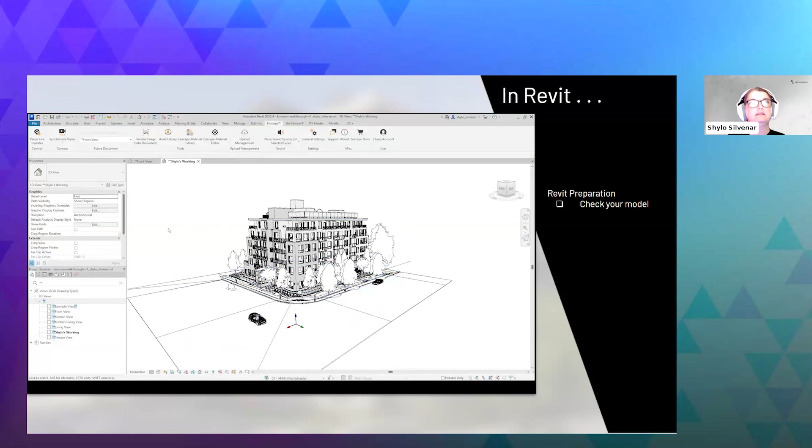So here, we're first just going to check out the Revit model, take a look at it. We're going to create a 3D scene specifically for our rendering before exporting and make sure that there isn't anything extra in that view, like this extra topography. Again, you can edit it in Envision later if you want to, but it's just nice to get this step out of the way early.

A quick tip is to pay attention to your links and additional models in your Revit file. If the positioning isn't too precise, we can import those separately and combine them later in Envision, giving you more granular control and potentially better results. Enscape is pretty good at handling large models as well as multiple links, so either way is fine. If something causes slowdowns, like an enormous file or a slow computer, just take a minute to hide what you don't see in your rendering view, and that should help.

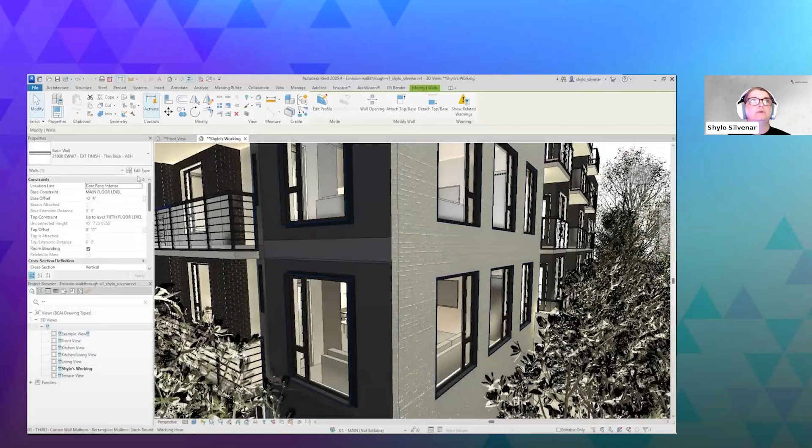Here we're going to take a look at our materials. You just want to make sure that your textures are showing up properly. Envision has the Cosmos library, which is full of materials you can use for general stuff, so you really just want to focus on your custom manufacturer materials and things that are really specific to your project.

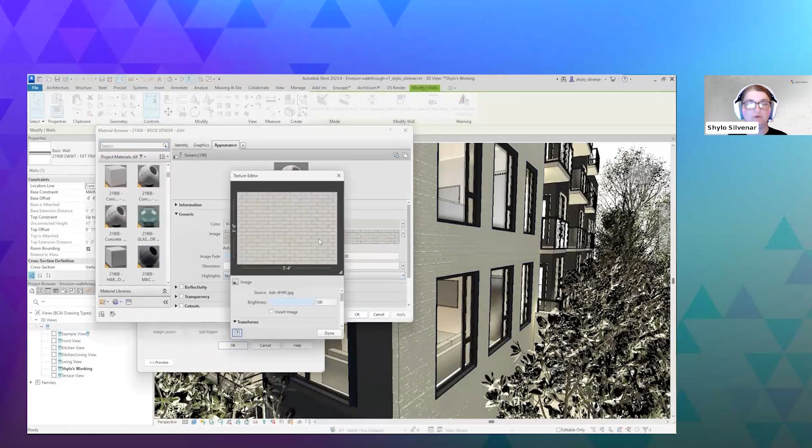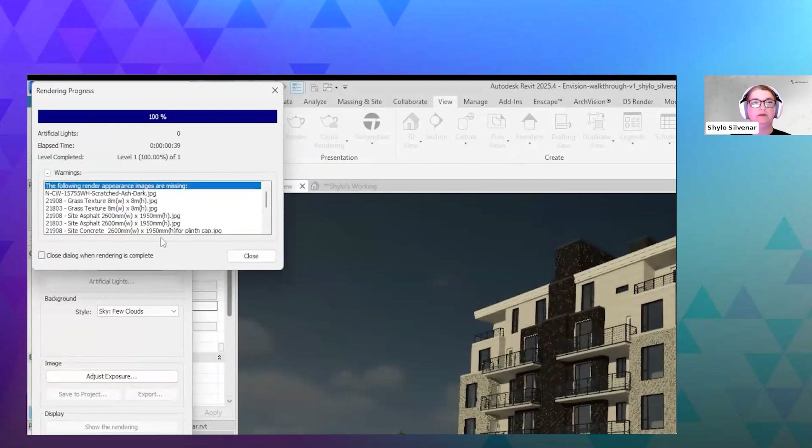This is a nice tip that I found helpful. If you run a rendering in Revit and uncheck that close dialog box, it'll give you a list of missing textures, and I thought this was helpful. None of those are particularly needed for this project, so I wasn't real worried about them, but it's a nice thing to have in your back pocket when you need to find out what you're missing.

Once the model looks good, you launch it in Enscape. Take a look for anything that might be a little bit buggy, whatever. You don't have any flying trees or anything like that.

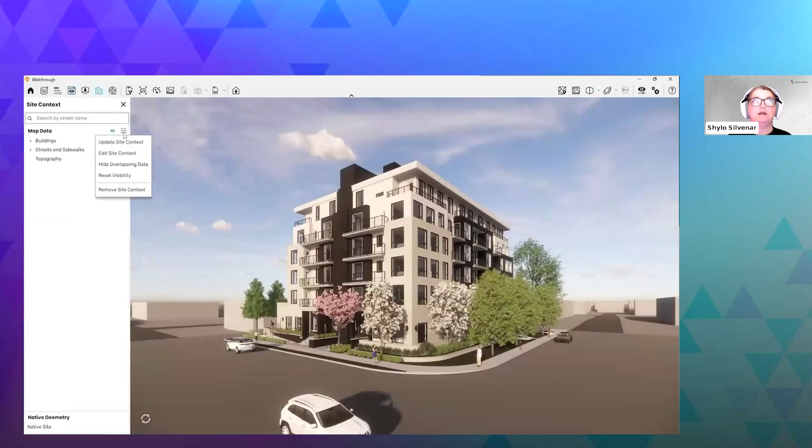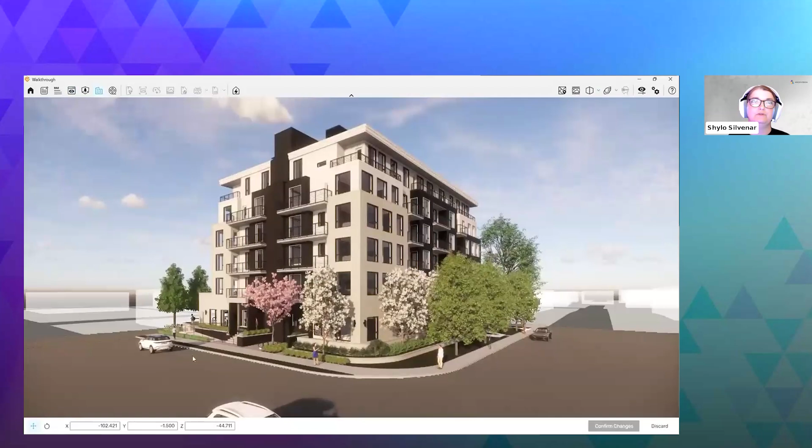You may want to add some context. This one did not come with a site context, so I am using the site context option in Enscape, which is really nice. I found the location on the map in there and downloaded it. It's a little bit off, so you might have to adjust it a little, and the topography might not match up exactly. So what I did here was lower it down a little to set it in the background, just to give it a little context.

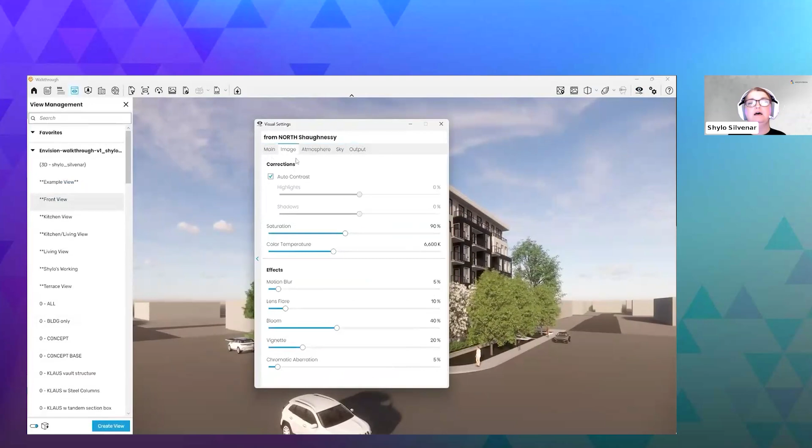What we're doing here is checking the visual settings. It's worth taking a look at what settings you have in Enscape if you use it often enough and have settings that you like. You might want to take note of those so you can then look at your settings in Envision. They're not going to be apples to apples, they are different types of settings, but there are a few things you might be able to match up, or it might give you a hint as to how you've liked your images to look in the past. Things like outlines and the styles in Enscape aren't going to translate, so just keep that in mind moving forward.

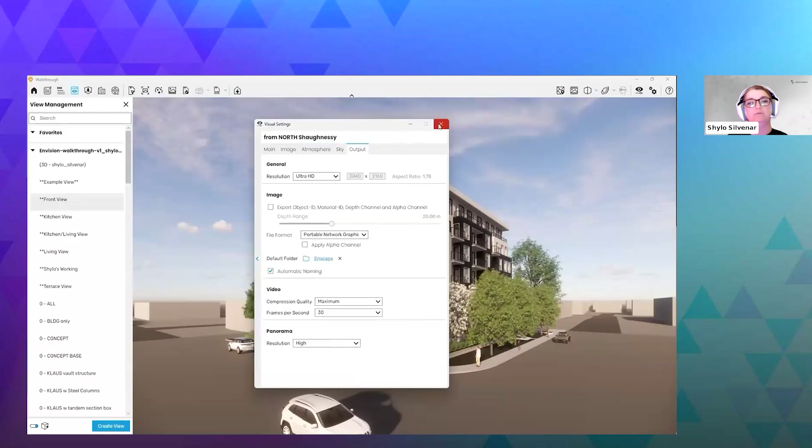To export in Enscape, you're going to go up to the V-Ray Scene export icon at the top, select your view, and export. Super easy. It might tell you a little bit about its limitations, just click on through that. And it's already pre-named, so you're just going to find your project folder and save it there.

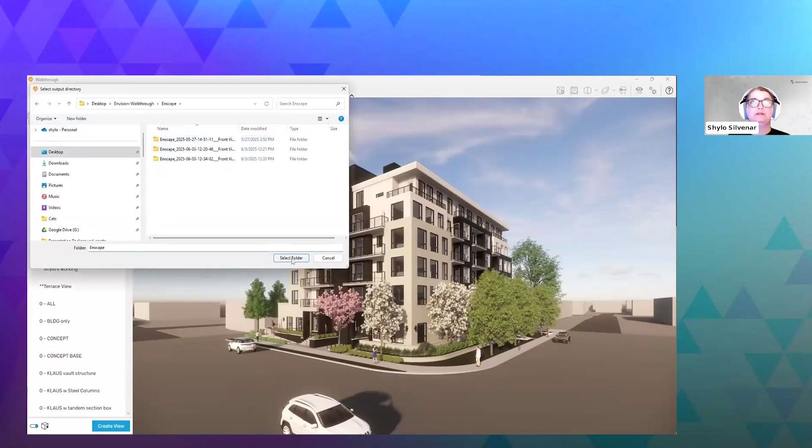So now we're going to set up our scene in Envision and get started. When you open up Envision, you'll see the homepage and options that you expect. For a deeper dive, I suggest visiting the Get Started tab and that link there to go to their online course. We're going to start a new scene.

When you open it up, it's going to highlight all of the UI elements for you. I'm not going to go through this, you're welcome to go through it at another time. You can toggle this on or off anytime, so if you want to bring it back up, I'll show you how to do that. You can go into your preferences, and here you can set up your theme as well as hide or reveal onboarding screens.

Importing our file is pretty straightforward. Import, find your file, open, and it's super fast. So you probably could have figured that one out on your own.

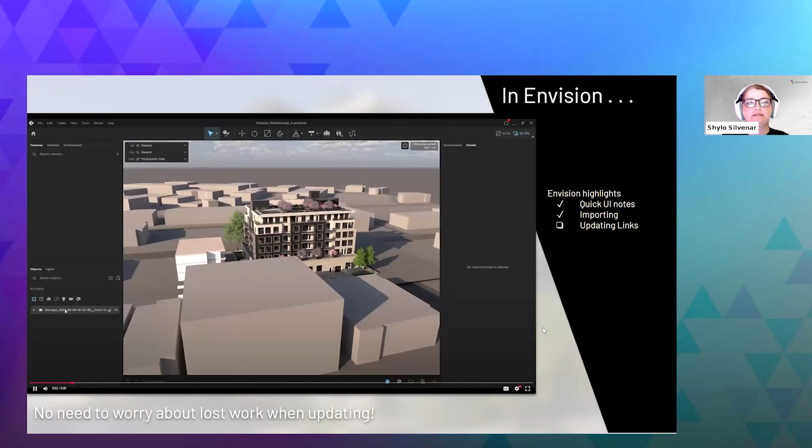If we need to update or replace our link, you want to select the model at the highest hierarchy in the objects panel, and you have a couple of options on the right. You can replace it by selecting the little folder icon, and all you have to do is click that and find the one you want to swap in its place, or you can hit the plus sign to add a new version. That allows you to swap back and forth between files so you can compare something. It's worth noting that things you've worked on, like if you've moved stuff around or done any work in your project in Envision, when you update that, it's not going to change anything as long as it still exists in the project you're importing.

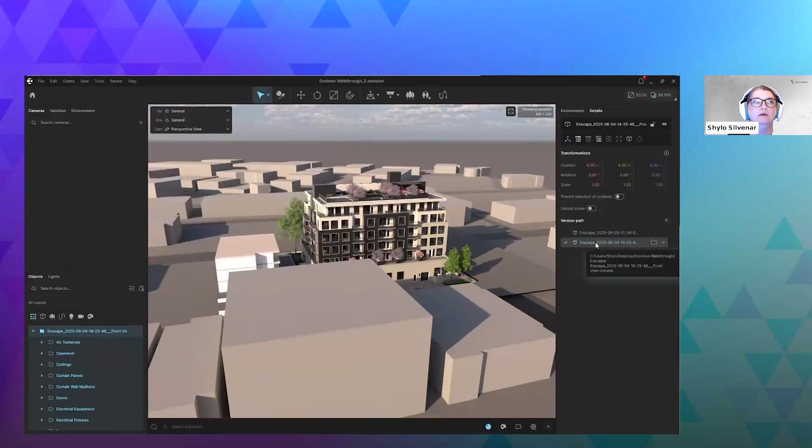Envision may not import our cameras, and it did not for us, so we're going to have to create one. You can do that on the left-hand side by clicking the plus icon, and you can rename it by double-clicking here.

It's worth noting that it has its own category in the objects list below. And don't forget to lock your cameras when you get them to the right spot, because it's real easy to not realize you're in your main view.

Clicking on the camera opens the contextual view under details, and here you've got all sorts of settings. Under general, we've got our aspect ratios, we've got our focal length. We're setting it to something pretty typical like 35 millimeter, and we've got automatic vertical tilt. I'm checking this because we use 2-point perspective in Enscape.

Under the color correction options, I'm increasing bloom a little bit and locking the camera.

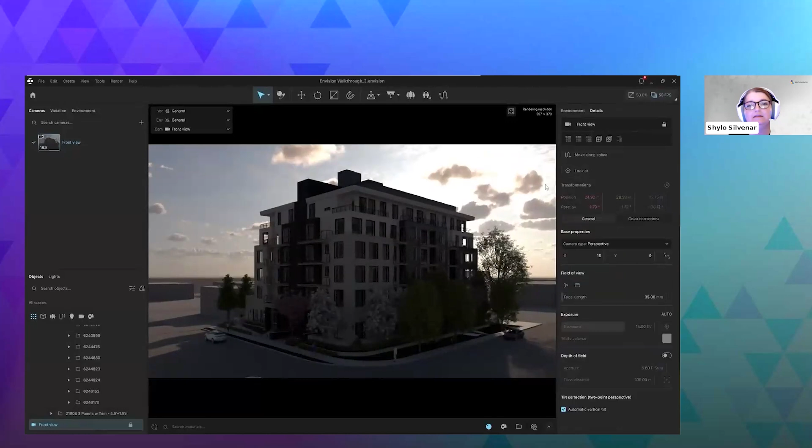You can come back later and further adjust the camera when you're ready. I wanted to highlight the color correction settings because I think they'd easily be overlooked, and that's where a lot of the settings available to you in Envision are located.

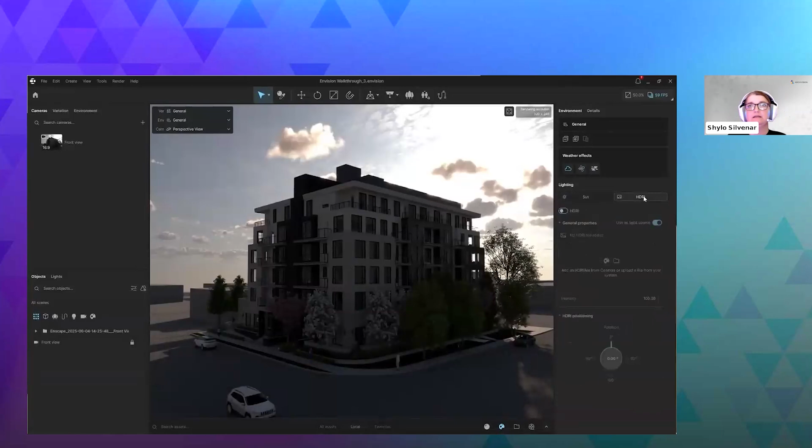Now that we've got our camera set up, we can look at our environment settings. So to do that, we're going to go over to the right, and here we have some weather effects that you can turn on or off or adjust. We have the clouds on, wind, haze. We have physically based lighting and HDRI lighting that can be used independently or together. Cosmos has a lot of HDRIs available, or you can load your own.

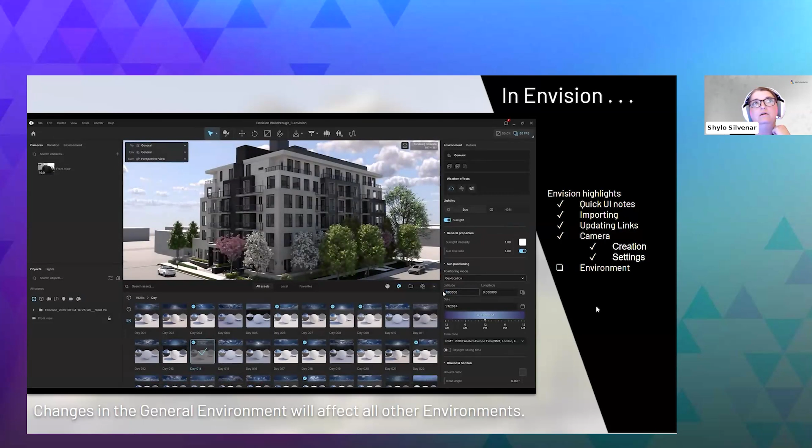We're going to use the sunlight settings and the location of our building. Unfortunately, the view that I have here is a little bit shady most of the time, but we're rolling with it. Don't forget your time zone and adjust the time so that you can get your shadows right.

When we're happy with our settings, we can move over to the left side and create an environment to save those settings. Here you can see the new one that we just created and 3 others that I created previously for our animation later.

Envision has a really cool feature called variations. If you open the tab in the left panel, we can create a new variation by hitting that plus sign. You can see here that I already have 2 that I've created. The first one is pretty similar to the general variation that we have selected, and variation 2, I've put the building below the ground so that we can have it growing up out of the ground.

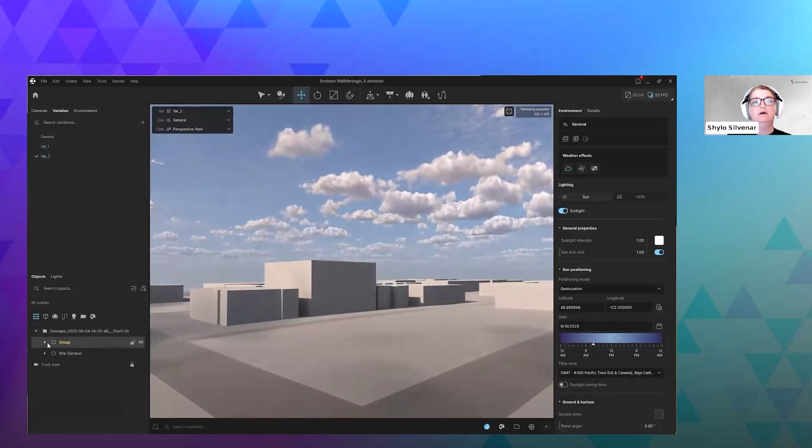There are some things that you cannot do in a variation except for the general variation. You'll notice here that the group nodes can't be grouped in one of the new variations. You have to go to the general variation to group nodes. This is because anything you do in the general variation tab will affect the other variations, and things like grouping have to be done globally in order for it to work properly.

So general variation affects everything. Things that would affect everything would need to be done in the general variation tab.

Okay, so now we're getting to the fun part. Envision actually allows you to edit the model, not just render and fly through it with a camera. So that's a lot more fun.

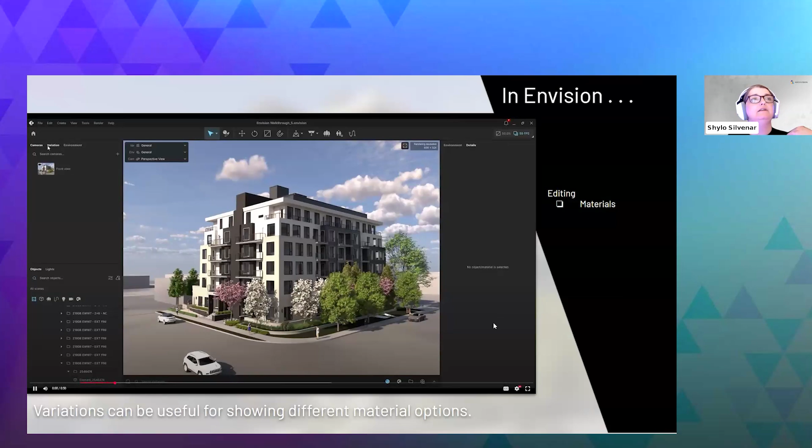Let's take a look at editing our scene in Envision. We're looking to make sure we're in the correct variation and the environment and the camera. So we're making a working camera here so that we don't mess up our front view. And our environment is general, the variation is general.

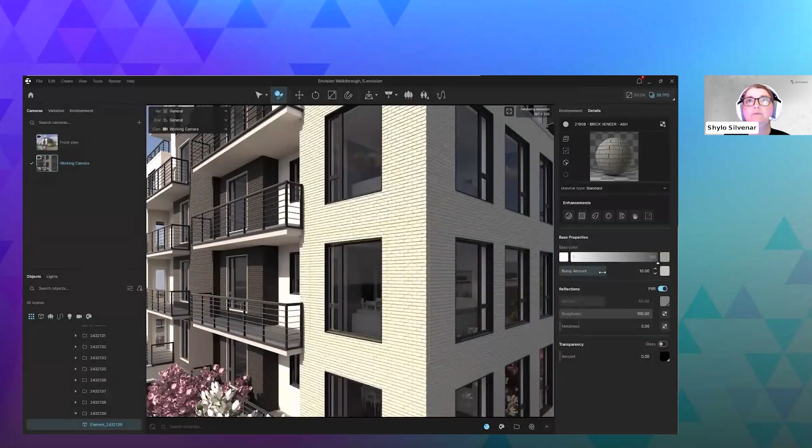We'll edit our brick material. So we're going to zoom in, which is why we added that working camera, and we'll use the eyedropper tool to select our material. Now there's all kinds of enhancements we can do, color changes we can make. I've noticed that the bump on this is going out instead of in, so we're just fixing that a little bit on both of these materials.

So it's super accessible, super easy.

Now we're going to edit some of the geometry. I've selected some of the site behind the building there, and I'm trying to scale it up, and you'll notice that it pops up off the site. That's because the pivot point is off somewhere that we have no idea.

So we're going to fix that by undoing the scaling that we just did, and we'll go up to the Edit Pivot Point button. We're going to move that pivot point to the bottom center of that object, and click Apply. Now when we scale, it will work just like it's supposed to.

So I like that the pivot point's really easy to adjust. It's handy for things like animating doors and stuff like that too.

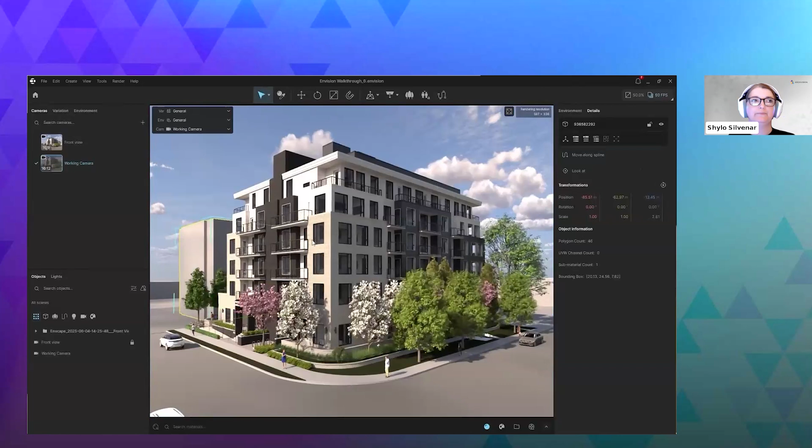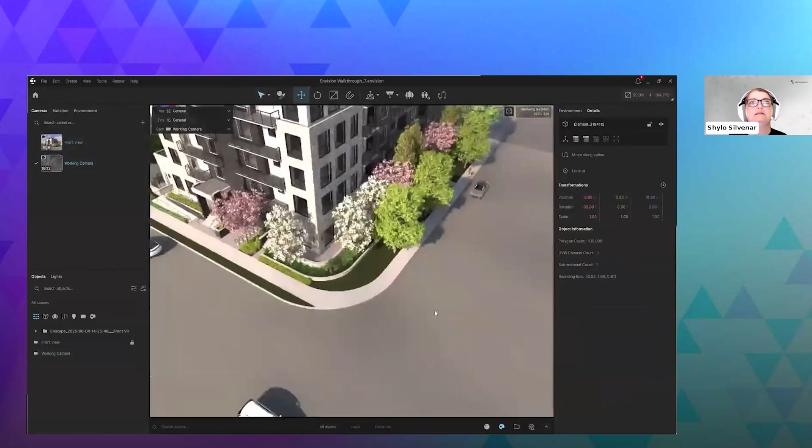We can totally edit assets we brought in, similarly to the geometry we edited a moment ago, with the idea that we're going to be animating the scene. We want to move these guys around to suit an animation since they're not animated, so we'll put them in places where it makes sense for them to hold still. This is really nice because it allows you to use assets already in your scene in a productive way. You don't have to reselect new characters or assets to do that. It just increases your variety and makes selection a little bit easier.

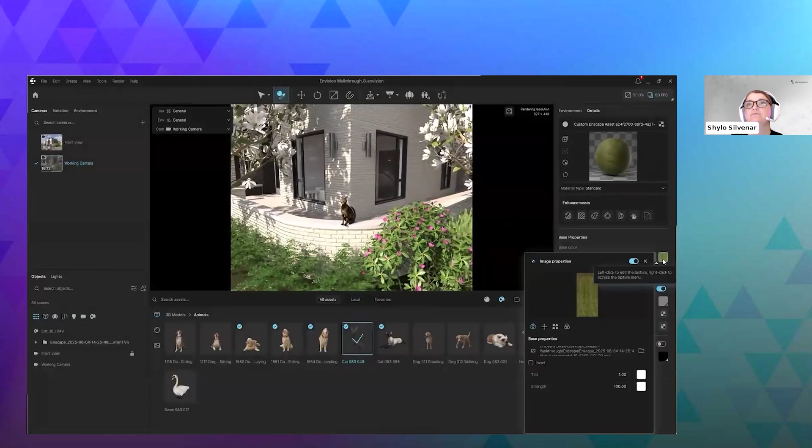Envision's Cosmos library is super easy to use. You can move, rotate, and scale, just like any 3D software. The limitation comes to materials - not all of the assets will give you options to edit any of the materials. Some of your other assets that you bring in, however, might allow you to edit the materials on them here. You'll just have to try them out and see.

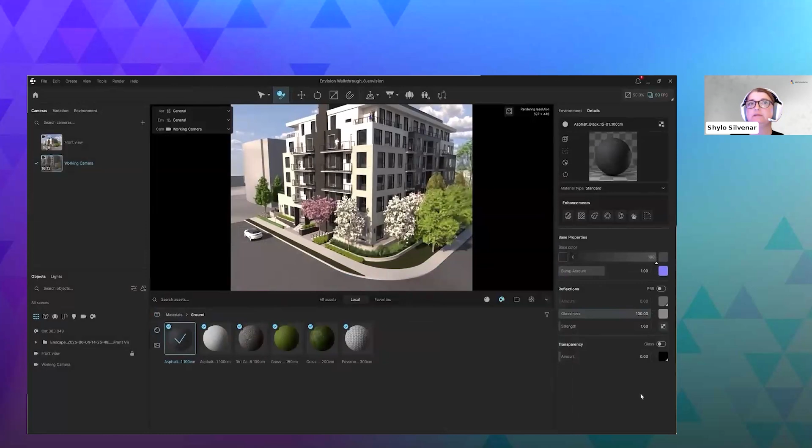Materials in the Cosmos library can be edited, but you have to embed those in your scene. So here we're adding an asphalt, and then you have to embed it before you can make any changes. I'm going to make the color just a little bit lighter for the sake of experimenting. Here, I'm also showing you that you can use the filter to see some of the additional options available in the Cosmos library. They have 40 characters, which we're going to look at in a little bit when we look at the animation.

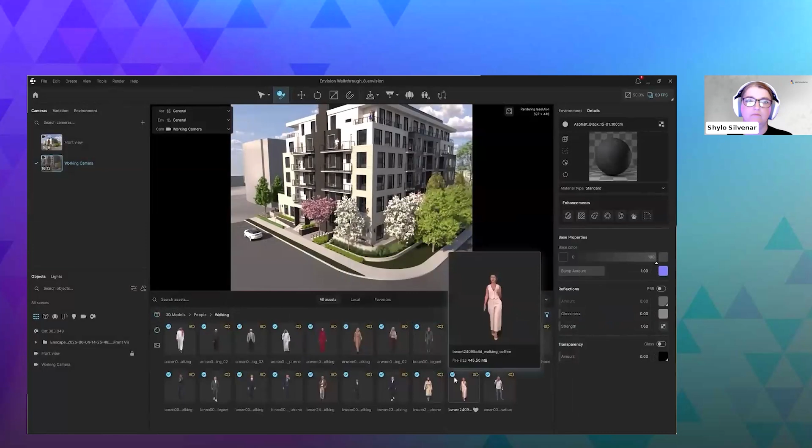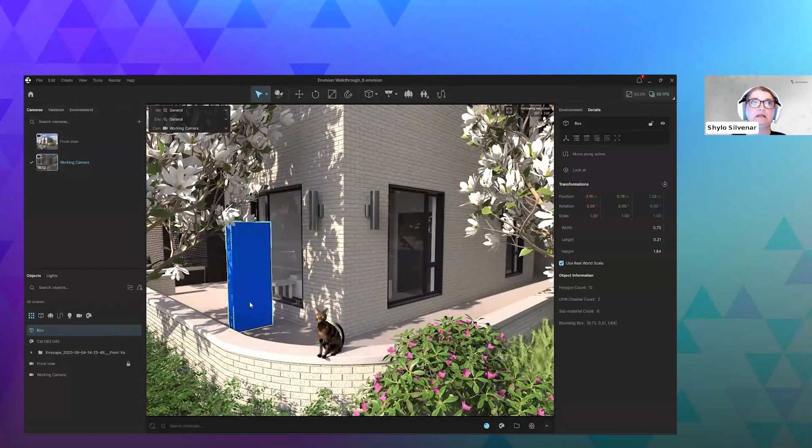Beyond the assets in the library, Envision also allows you to create geometry and lights. So here we see the shapes that are available - I'm going to create a box. This might be good for adding a contextual mass on the side, or maybe even a wall. I think it's nice to be able to do something quick and easy without having to go all the way back to Revit. We're going to add some lights to these sconces here, some sphere lights.

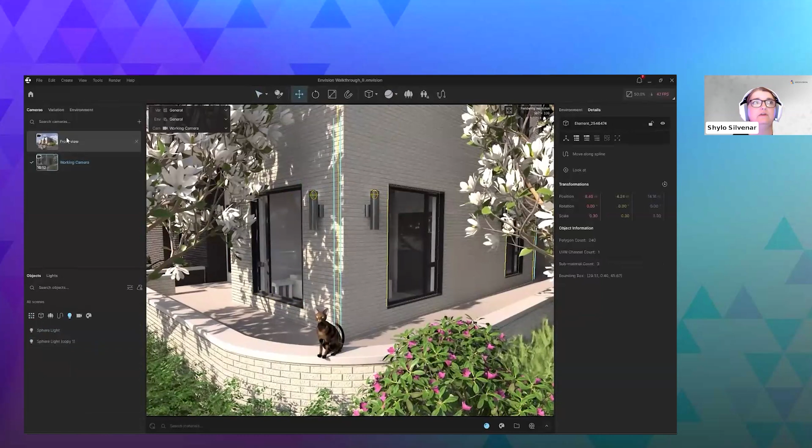Super easy to drop in and move around. To duplicate, I'm going to hit Control D. Right clicking can also give you that option. And so now they're really going to pop, and you have options for the color of the light and intensity. When we do that animation, the lights that we've added will really help the building stand out.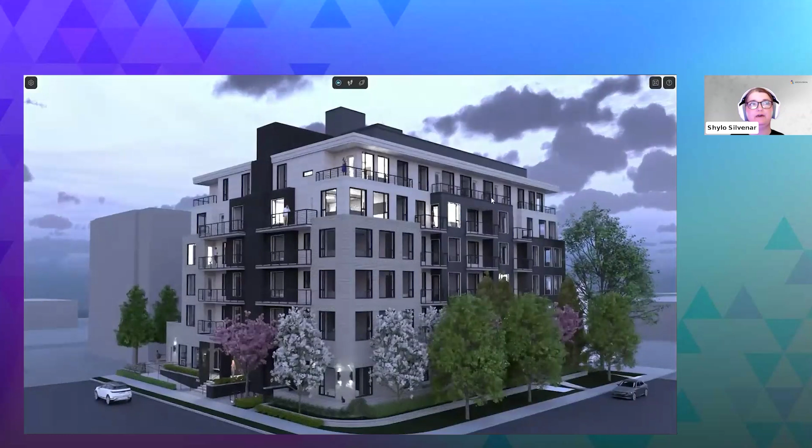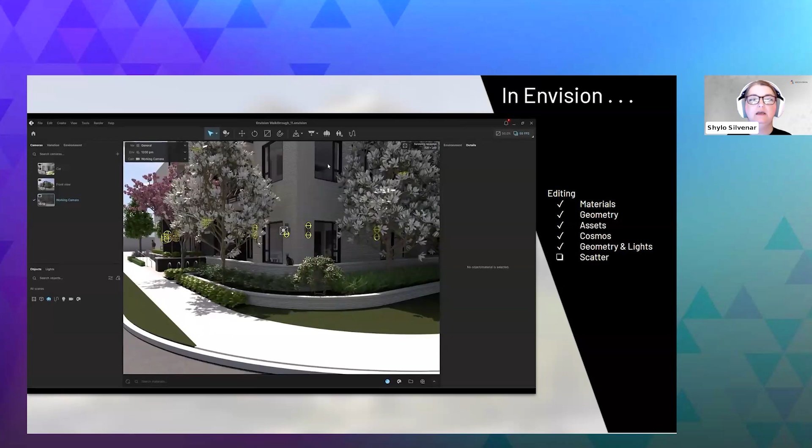I really love the scatter feature in Envision. I was always a fan of the grass in Enscape because I thought it did that texture nicely for you, but here you just have a lot more control over how it looks. So we're selecting that and picking the geometry or pieces that we actually want to show up in it, controlling how much of it we want to see. It's really nice. The other option is to use a preset - here we're dropping a grass lawn preset onto a section of grass, and that's super plush. There's a lot of grass in that.

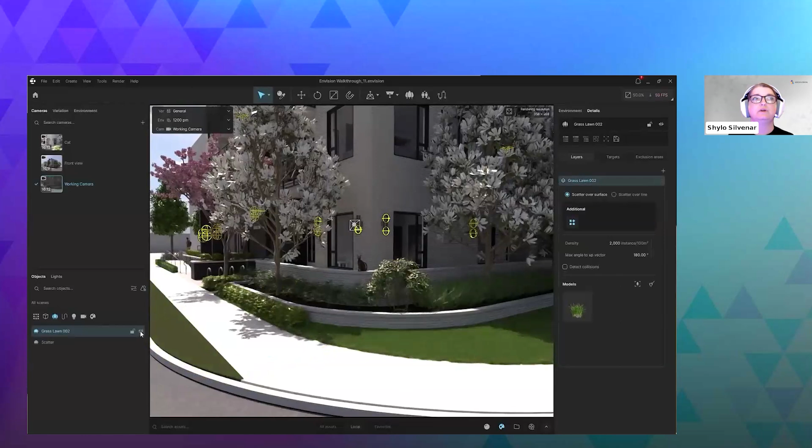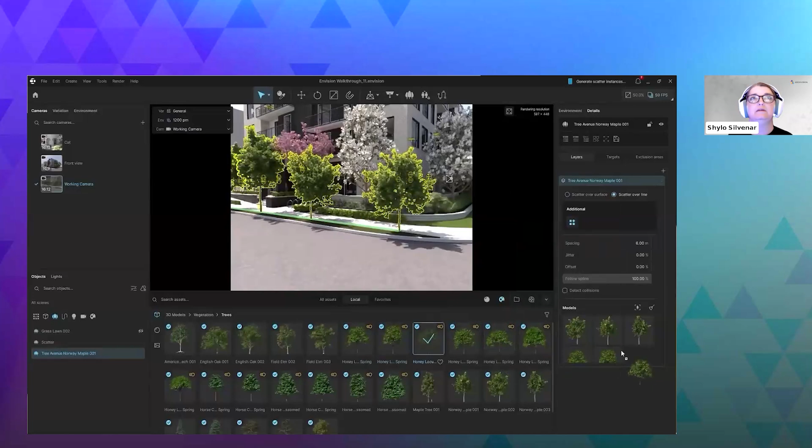So we're going to turn that off for a second so we can show you the preset for trees using a spline. The reason I don't put the spline on the grass is because it tries to attach to all the different blades. We're going to drop that on there, and you can control the type of trees, the size, the spacing. There are a ton of settings you can go through and play with to make it look how you want. And just remember to turn your grass lawn back on.

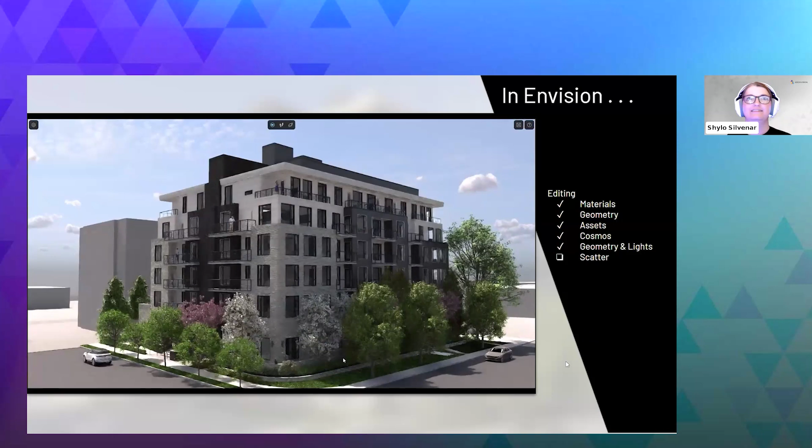All right, so now we're going to get into animation. It's one of my favorite parts of Envision. The firms I worked with always wanted animations, but the time involved was often cost prohibitive, and many projects just didn't have the budget for it. So this doesn't have to be the case anymore - Envision makes it super easy, and you can do a lot of things very quickly.

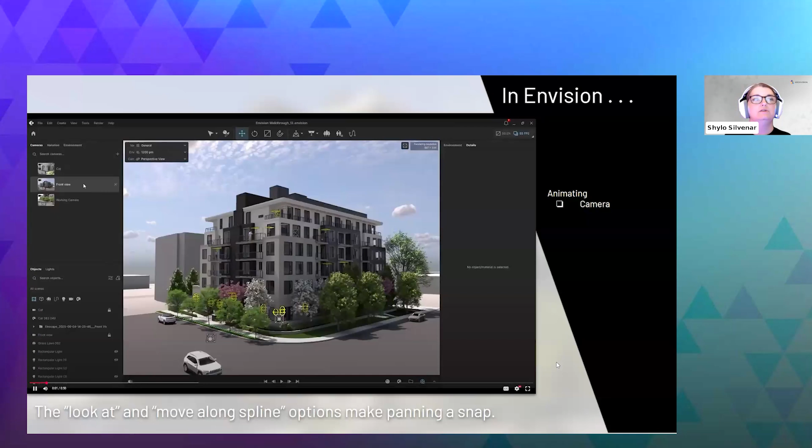So let's start with animating our camera. First, we're going to duplicate the front camera by selecting it and hitting the plus button, and rename it by double clicking on the name. To open the timeline, we're going to use the film reel at the bottom. We'll drag our camera into the timeline and scrub to the end of it. We're going to zoom in a little bit - and it's done, it's that simple. You can also use the look at and move along spline tools for panning, which is really nice.

So now we'll look at animating the environment for things like sun studies. I'm going to extend the camera to the end of the timeline and clean up the keyframes, so now it goes the entire timeline. And we've got those three environments that we made earlier. I'm going to drop those in, and then it's the linear portion of the transition between these that's really important - that's where it's going to animate the sun moving through the sky.

So we want to make those pieces that we drop in as small as possible, and we're spreading it out over the timeline. We're just eyeballing it, but if you want to be super precise, you can right click on those pieces and type in the time.

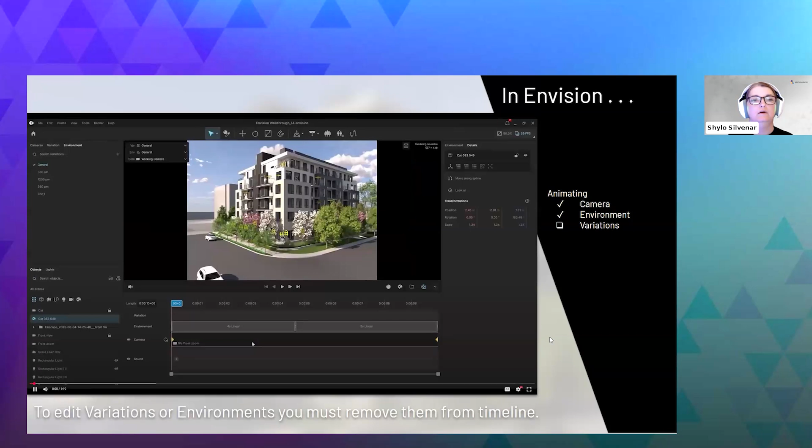So animating variations can be a little bit tricky. Once you get used to it, it's really handy. So in the variation tab, you can see the two variations that I created for this, and you can see that the trees we just created are above the ground when the rest of it's below the ground.

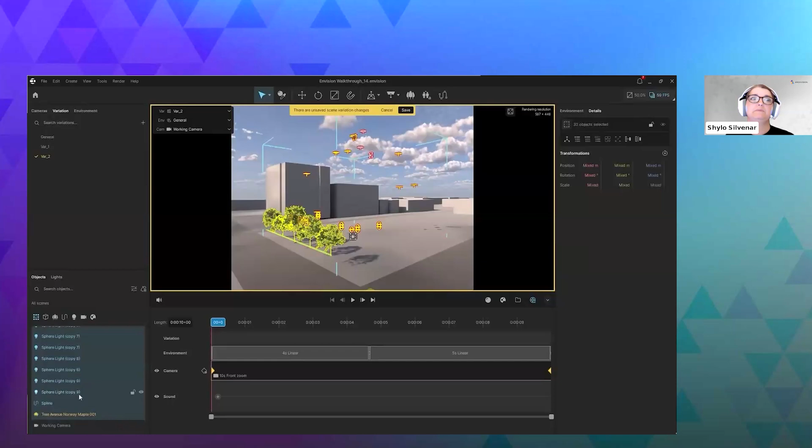So we're going to fix that by creating a group, and I've sped this up a little bit. We created a group of things that need to move below ground that aren't a part of the original model. I've done that and called it move with building. And we're going to go below ground. We don't have to be too precise with it down here because you're not going to see it, but you want to get it pretty close so that the timing matches when they come up above.

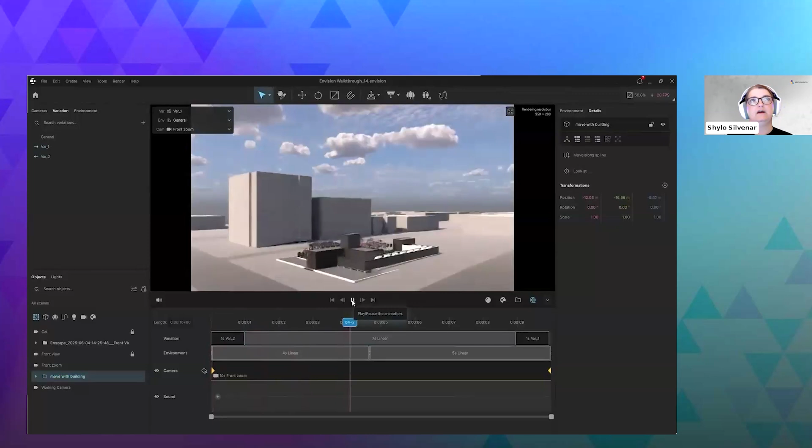So we're dragging those variations into the timeline, and we're going to leave the hold parts a little bit on the bookends just so that there's time for it to be underground, then the transition, and then a time for it to be above ground. You can play with this and do whatever you'd like, but just to be quick about it, we're making it super simple.

So here's the result of that, just to do a draft for you. This is a draft rendering. It is not a high quality rendering. I think it gets a little bit better with the higher quality to fill in the light because that was kind of dark.

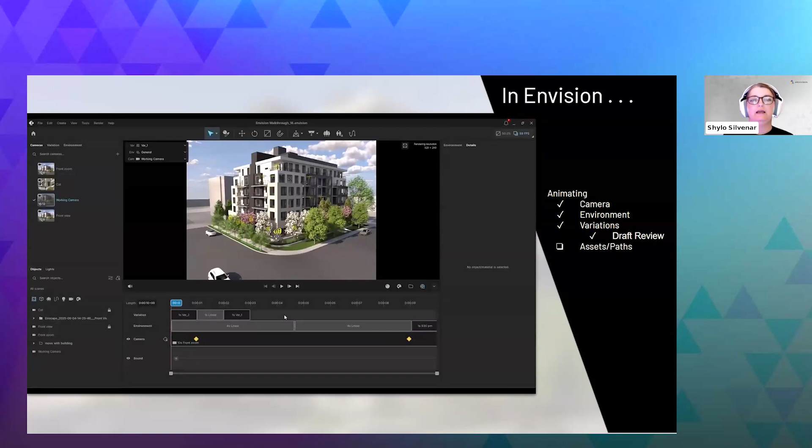So we're going to animate in two ways here. First, we're going to work with variations, much like we did a moment ago. We're going to use this car over here as an example. We're in the general variation right now, and we're moving the car to the beginning of where we want it to move from. Then we're going to duplicate variation 1 because it's the latest in the timeline, and we're going to move that car forward to where we want it to be, and hit OK.

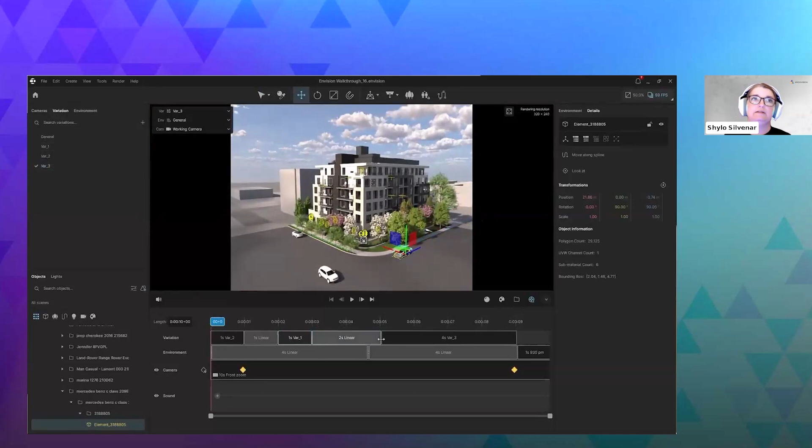Now drag that into the timeline. The part you want to pay attention to here is that linear portion, because that is how long it takes for it to get to where it's going. So if you want the car to move faster, you want that linear portion to be shorter.

The other way of animating is with splines. We're going to use this car for this portion of it. I'm going to create a spline here. You start where you want the car to start from, and the second end of it's going to be where you want the car to go. And hit done. You'll notice that it's invisible right now.

That I think is a little bit of a bug, but it could be user error. I'm not going to say that I know for sure that it's a bug, but it did it to me a few times. You just got to turn it back on, and we're attaching that, rotating it negative 90 degrees, and then adjusting the speed.

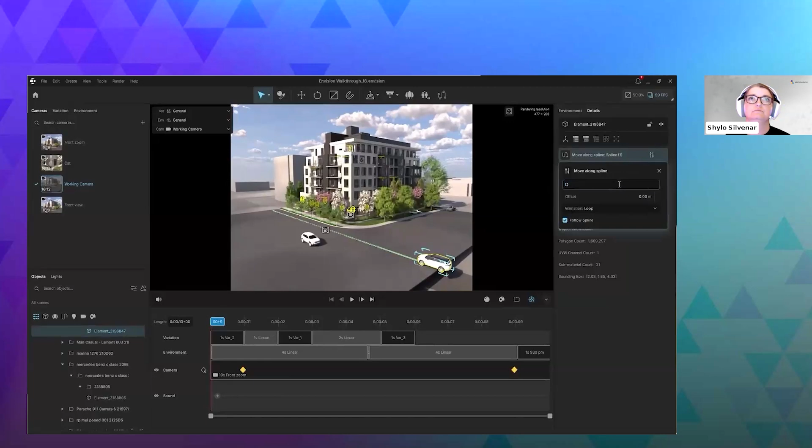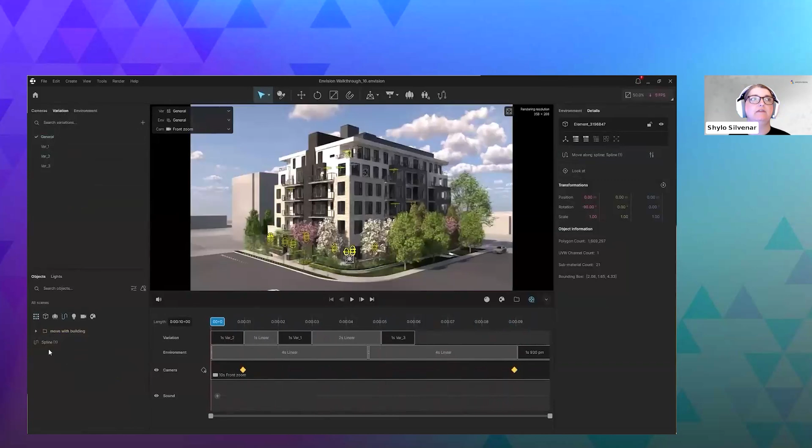Now both of those are animated. It's real easy. You will notice again that this is above the ground, so we're going to fix that. We can't move it there, so we're going to have to go to the general variation and then move it into move with building. That way it'll actually start at the beginning with it.

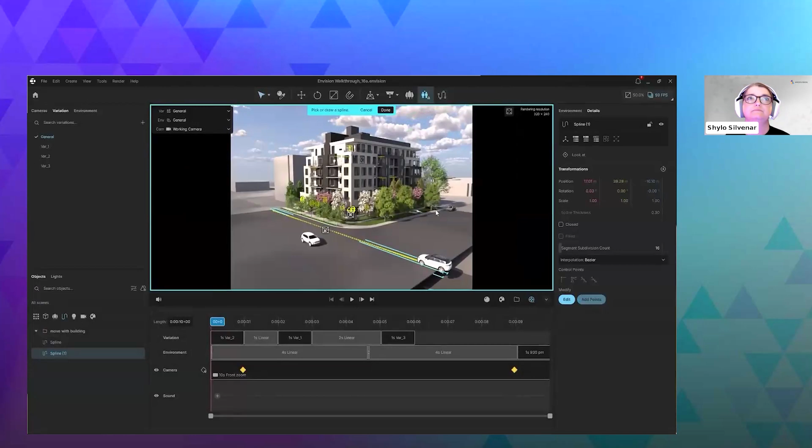Now we're going to animate with the Anima crowd simulation, which is really easy. You just click on the Anima button there at the top. Make sure that you're in the general variation and environment and in your working camera so that you can zoom in. We're going to zoom in and make sure we're getting in the middle of the sidewalk. Click done when you get that in there.

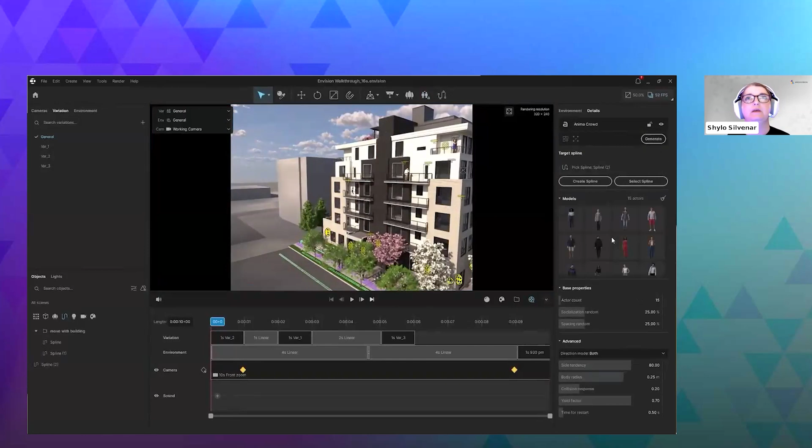We're going to increase our actor count a little bit so that we have more people. I want to be able to notice them, and hit generate. It's going to select all kinds of people that are going to now walk on that spline.

And again, they're above ground. So we're going to do the same thing we did before and drag them into our group for move with building. And now they sprout up just like everything else.

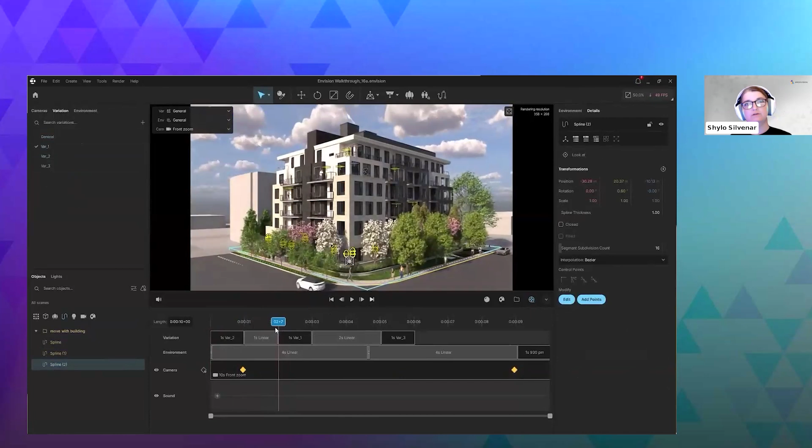All right, now we're finally at rendering. First, we're going to render a still image. To do that, we're going to set up our variation to general, environment to general, and use our front view, and go to render still image.

You've got some different options for the camera types, your resolution settings, your render quality, etc. You have 13 channels for post-processing to pick from. I'm picking all of them just so I can show you what those look like when they come out.

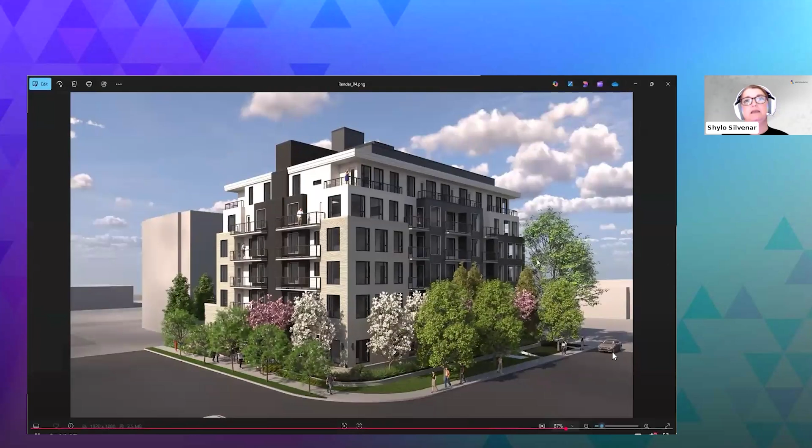Name it here, tell it where you want it to go, what type of file you want it to be, and hit start. I'm not going to make you wait for that, so that's your result there. These are your channels.

So now we're going to render the animation. Again, go to render, render images, and click on sequence. You've got similar settings, similar cameras available. I'm keeping mostly the same settings here.

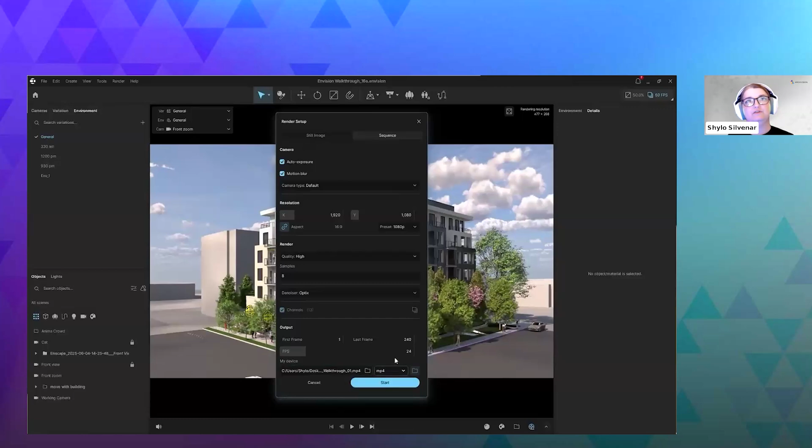Naming it. I like really long names, apparently. So those are the file formats you have available, and then click start. And that's the result.

So again, you have our final results here. Could it use some tweaking? Absolutely. But we just wanted to make this really quick so you guys can kind of get an idea of what it's capable of.

So we covered starting out in Revit, exporting to a VR scene via Enscape, importing that VR scene into Envision, setting up our cameras, variations and environments, adjusting materials and assets, animating the scene, and rendering out a high quality view and animation, all in a relatively short amount of time, given there was some speeding up there, but that was still pretty quick.

Some of my favorite parts were things like it's pretty simple to get started. It's pretty intuitive. The animation is really versatile once you get used to it. You just got to kind of wrap your head around it.

The variations are really nice for quick changes. I know that when I worked in architecture visualization for firms, they would often like to see multiple varieties of options, and variations can do that for you.